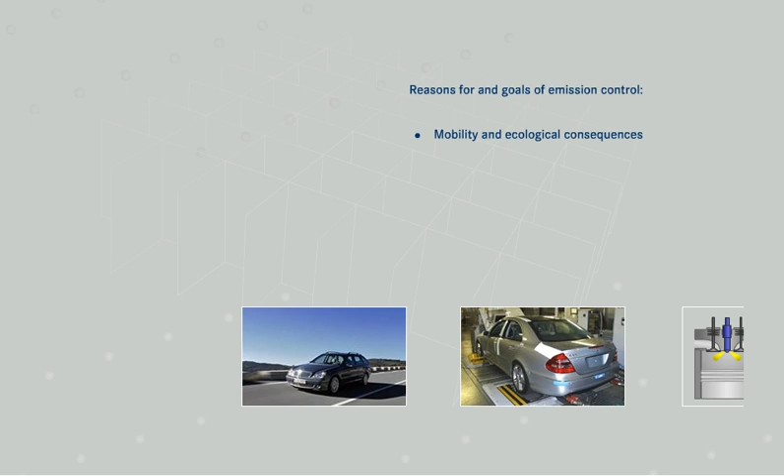Chapter 1 of this CBT program describes the reasons for and the goals of emission control. Firstly, the continued growth in individual transportation and the environmental consequences of this are dealt with. Then various national regulations and engine-related measures for limiting exhaust emissions are presented. Finally, the prerequisites for emission control are explained.

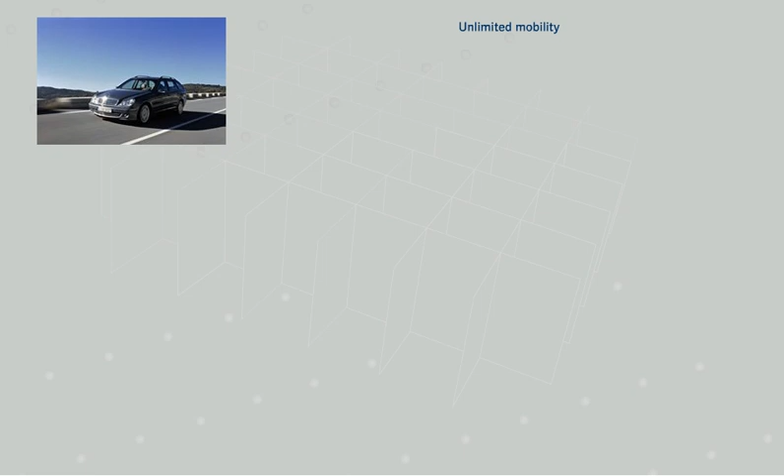The unrestricted mobility that individual transportation has given us is now part of everyday modern life. Likewise, the supply of food and consumer goods of all kinds to all areas by long-distance haulage is taken for granted. The downside to this improvement in our quality of life, however, is that the air and the environment are being increasingly polluted by harmful emissions from vehicles.

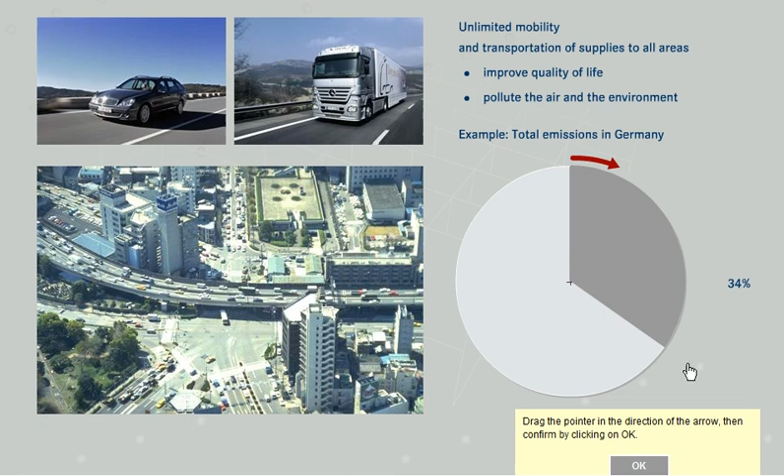Let's take Germany, for example. How much of the total volume of pollutant emissions comes from road traffic, do you think? Select a figure from the pie chart. As you can see, road traffic is responsible for around 34% of all emissions in Germany.

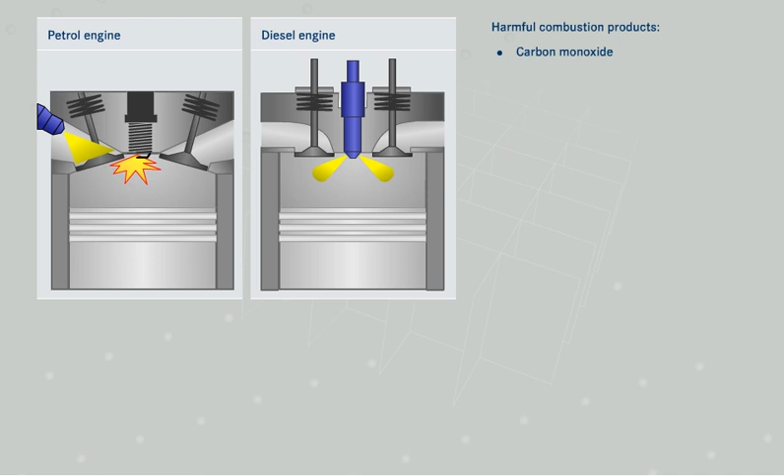The combustion of the air-fuel mixture in both petrol and diesel engines produces not just carbon dioxide and water vapour, but pollutants as well. These are carbon monoxide, nitrogen oxides, sulfur dioxide, and hydrocarbon residues. Combustion of diesel fuel also produces soot particulates.

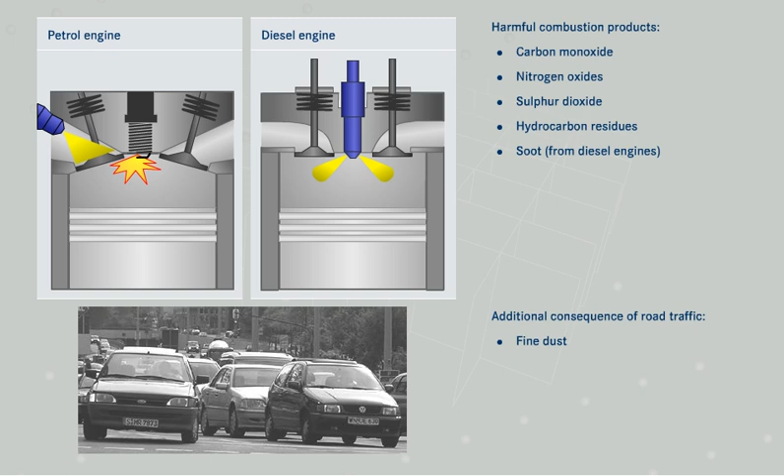An additional consequence of road traffic is the formation of fine dust. Fine dust is created not just from diesel soot particulates, but also from the abrasion of tyres, brake linings and pads, clutch linings, and road surfaces.

Click on the names of the pollutants to learn more about the effects they have.

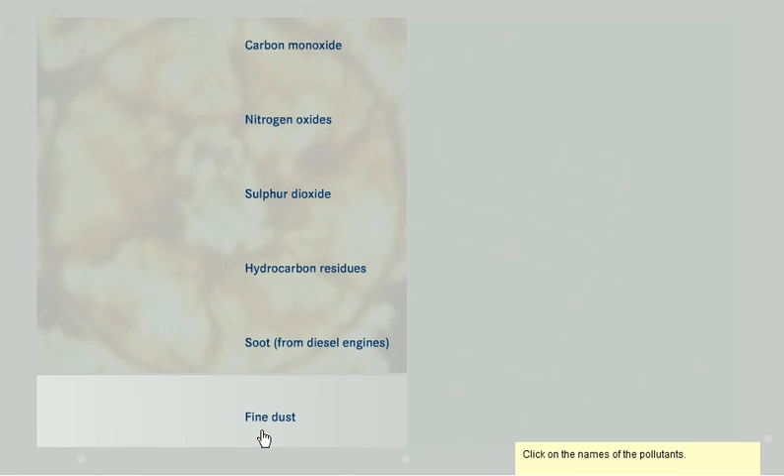The chemical symbol for carbon monoxide is CO. Carbon monoxide is poisonous because it reduces the ability of the blood to absorb oxygen.

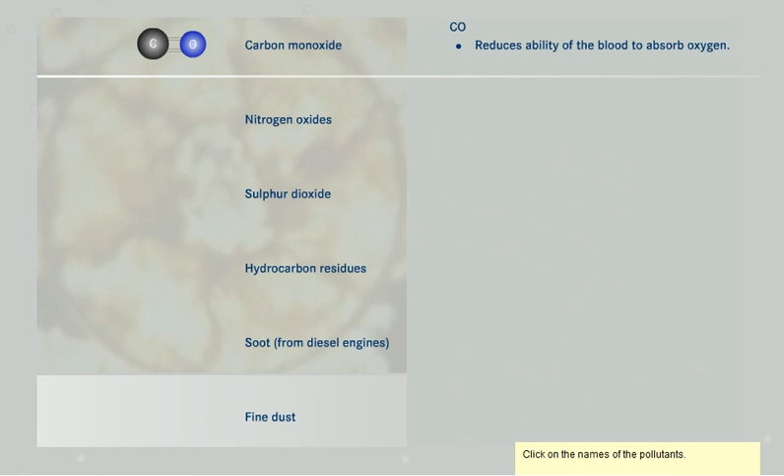Nitrogen oxides, NO and NO2, are usually referred to as NOx. They irritate the mucous membranes, affecting breathing in particular.

Sulfur dioxide has the chemical symbol SO2 and is a colourless, poisonous, pungent-smelling gas. In high concentrations, sulfur dioxide burns the mucous membranes.

Hydrocarbon residues are usually abbreviated to HC. In persistently high doses, unburned hydrocarbons are carcinogenic.

Diesel soot consists of ash and unburned hydrocarbons. Emissions of soot are measured in grams per kilometre and are referred to as the particulate mass, or PM for short. Soot particulates are thought to be carcinogenic.

Like diesel soot, fine dust is measured as a particulate mass, but in smaller units of micrograms per cubic metre. Fine dust has been categorized by the WHO, the World Health Organization, as harmful to health.

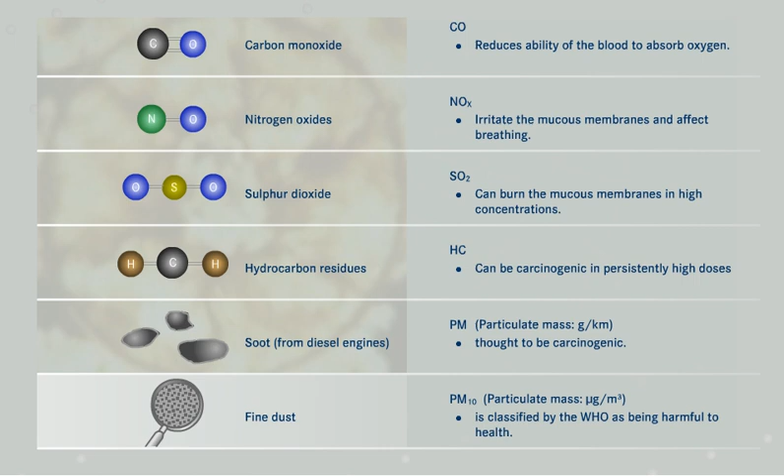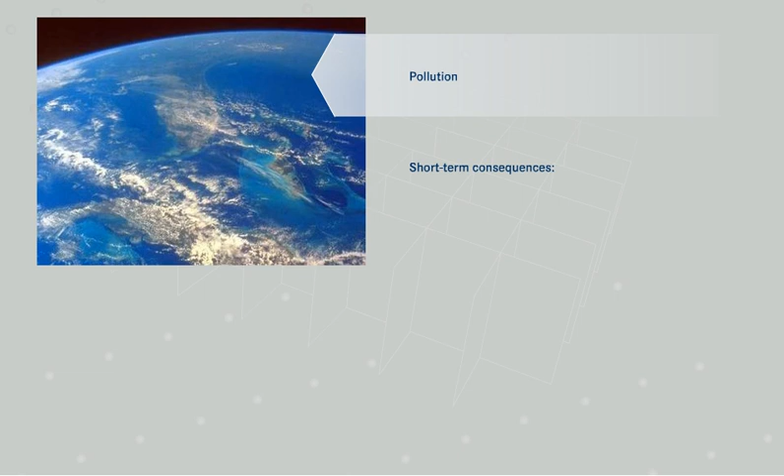All the pollutants listed here are not just harmful in the short term, they have long-term effects as well. The short-term consequences of the increased pollution of the air we breathe and the atmosphere are smog and fine dust. The long-term consequences are acid rain and the greenhouse effect.

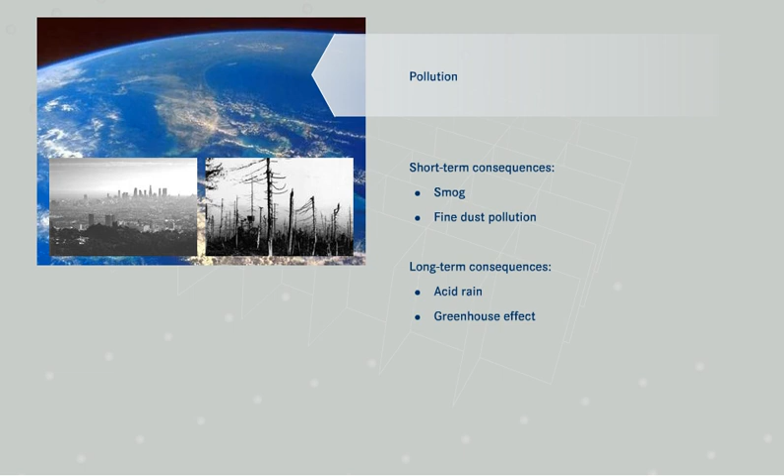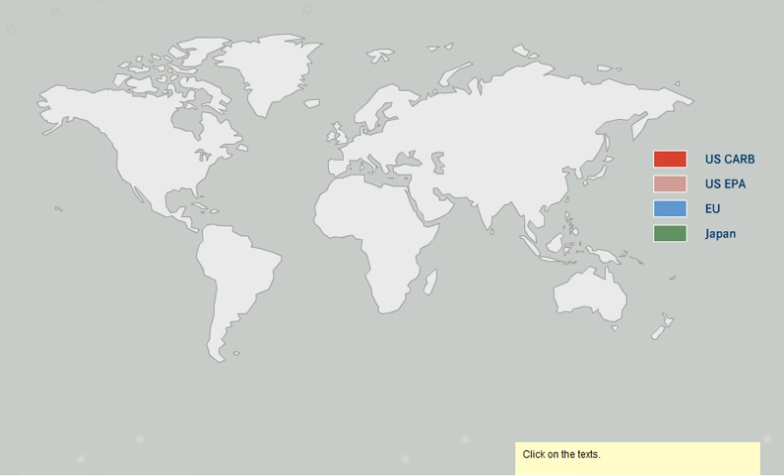Many countries in the world, for example the USA, Japan and the European Union, have set limits for the levels of pollutants in the exhaust gases of vehicles. Most of the world's emissions regulations have been drafted by the US CARB, the US EPA, the EU and Japan. You can learn more about the exhaust gas legislation drafted by these legislative bodies and the areas covered by clicking on their names.

The abbreviation CARB stands for California Air Resources Board. Though the emissions regulations for the maintenance of air quality that are produced by this authority are only applicable in California, they serve as a guideline for emissions legislation in other U.S. states.

The American Environmental Protection Agency, EPA for short, stipulates emissions standards for all U.S. states except California. Many other countries, for example Canada, Australia and Brazil, use EPA legislation as a basis for their own.

EU emissions legislation applies to the countries of the European Union. The emissions regulations of many other nations, for example India and China, are based on the European standards.

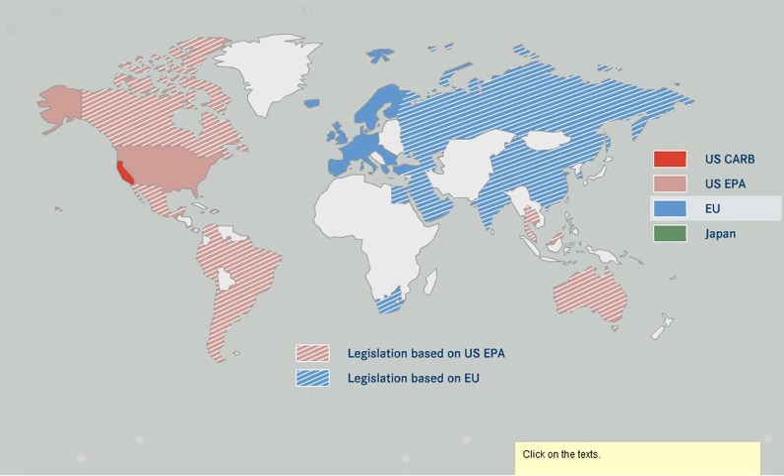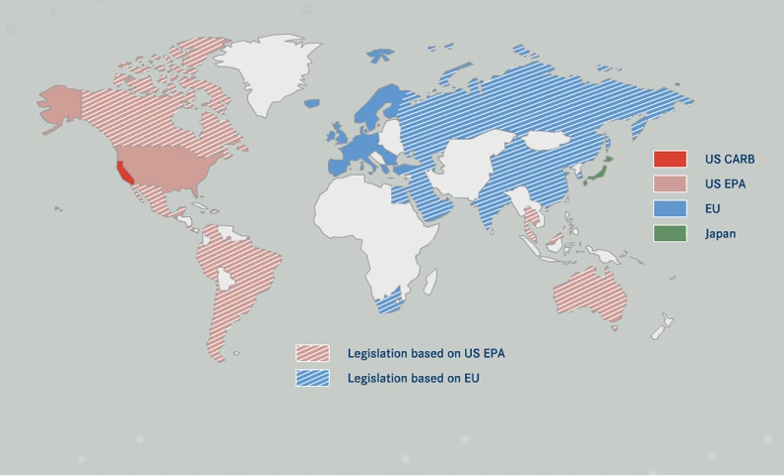Unlike other countries of the Far East and Australia, Japan has its own independent legislation. All the named legislation encompasses separate emission standards for passenger cars and trucks. Further information on this topic can be found in the glossary of technical terms.

Emissions legislation makes a distinction between vehicles with petrol engines and vehicles with diesel engines. In addition, vehicles are divided into the following classes: passenger cars, light commercial vehicles, heavy commercial vehicles, and heavy construction, forestry and agricultural vehicles. Vehicles are classified by a reference mass, that is, by vehicle weight.

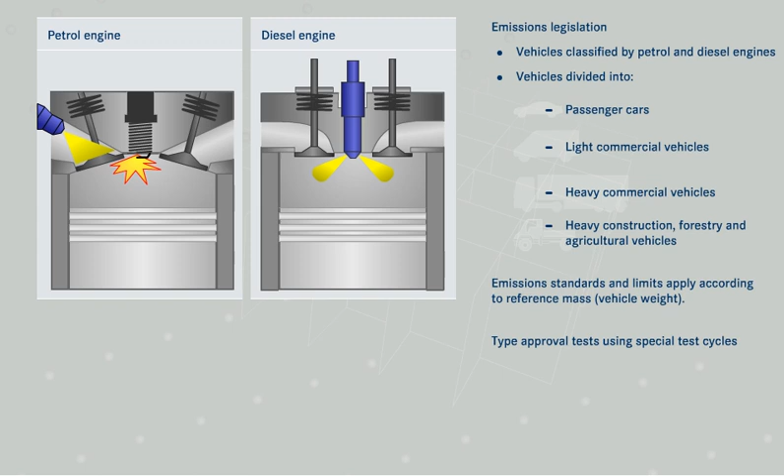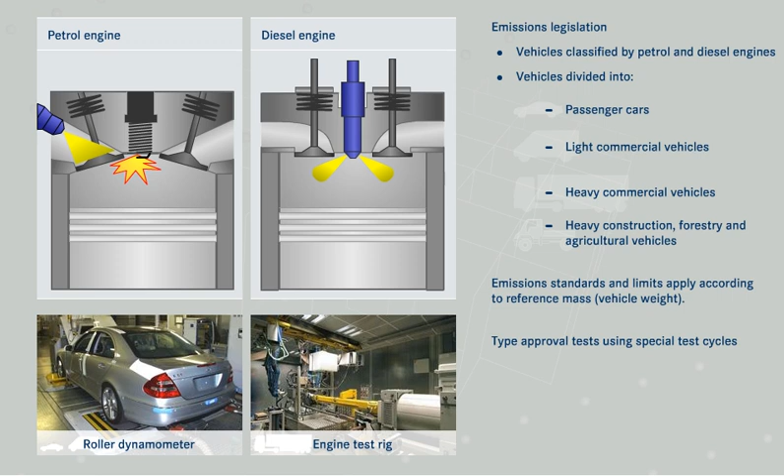The emissions standards and limits applying to passenger cars and light commercial vehicles are different from those for heavy commercial vehicles. Type approval tests check that the emissions standards are being adhered to. Here, new vehicle models have to complete special test cycles under very specific load conditions. Where passenger cars and light commercial vehicles are concerned, the complete vehicle is tested on a roller dynamometer. In the case of heavy commercial vehicles, only the engine undergoes the test cycle on an engine test rig.

Click on the diagrams to learn more about the corresponding emissions tests.

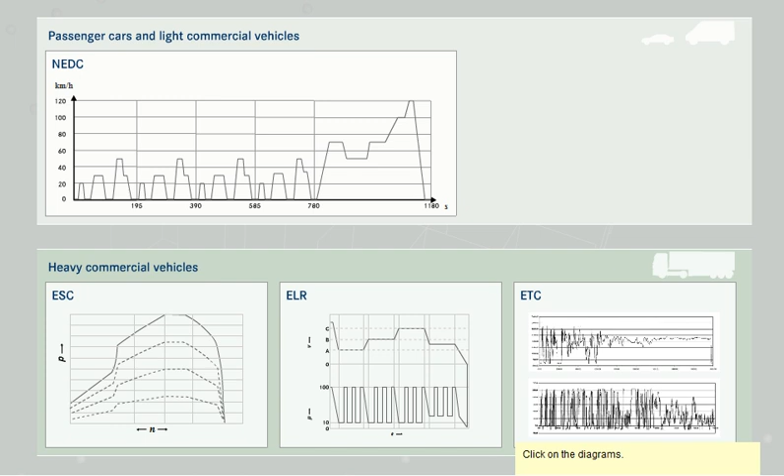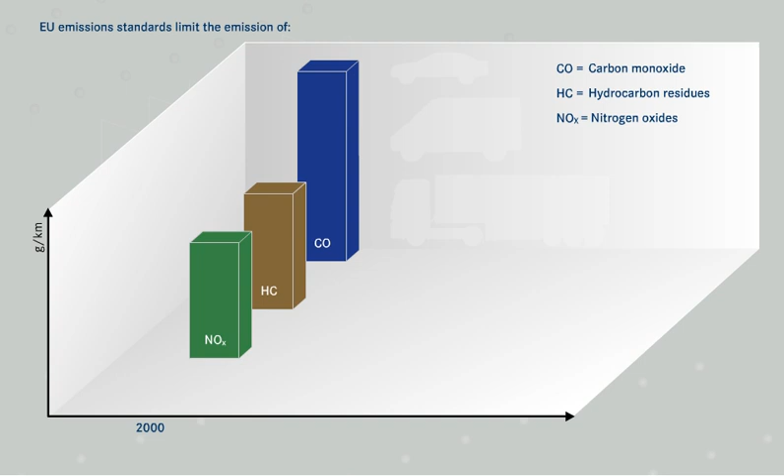Depending on vehicle class and whether the vehicle has a diesel or petrol engine, the European emissions standards impose limits on the emission of the following pollutants: carbon monoxide, hydrocarbon residues, nitrogen oxides and, in the case of vehicles with diesel engines, soot particulates. History shows that the limits for these pollutants have been lowered with each new emissions standard, and pollutant limits will continue to be cut in the future too.

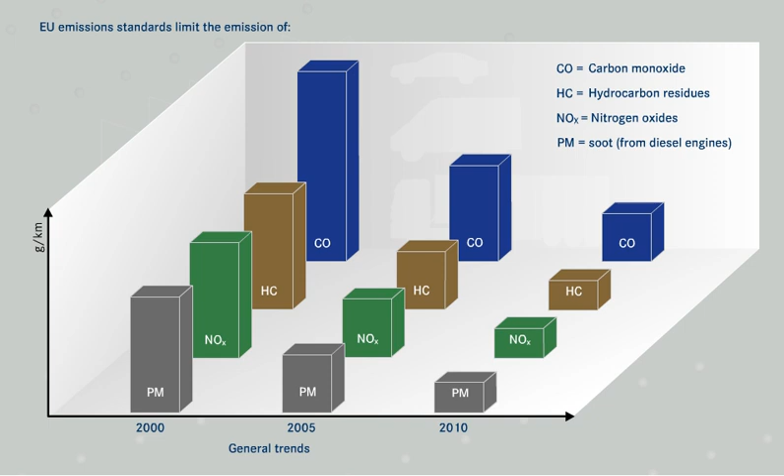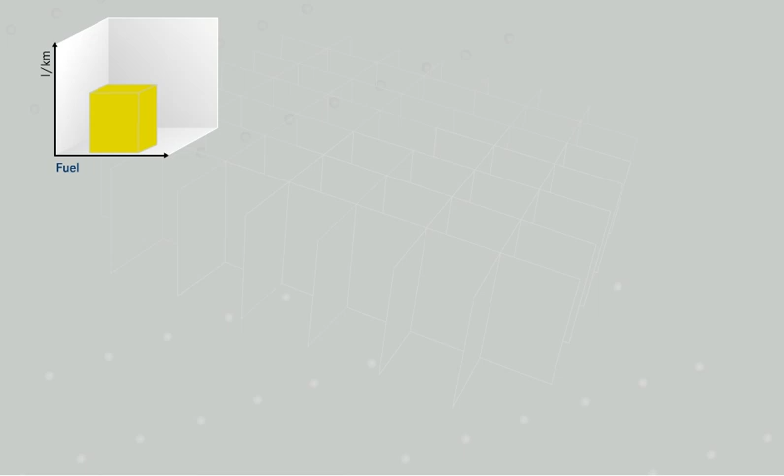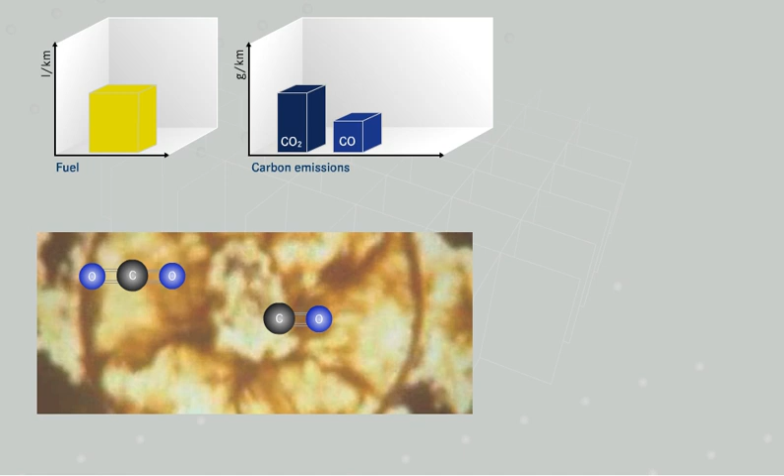Reducing the average fuel consumption is the most obvious way of reducing emissions from vehicles. Why is that so? When combustion occurs in the engine, carbon, the main component of fuel, combines with the oxygen contained in the intake air to form carbon dioxide and carbon monoxide. Partially burned fuel components produce the harmful hydrocarbon residues. The more fuel is used, the more carbon monoxide, carbon dioxide, and hydrocarbon residues are released as a result.

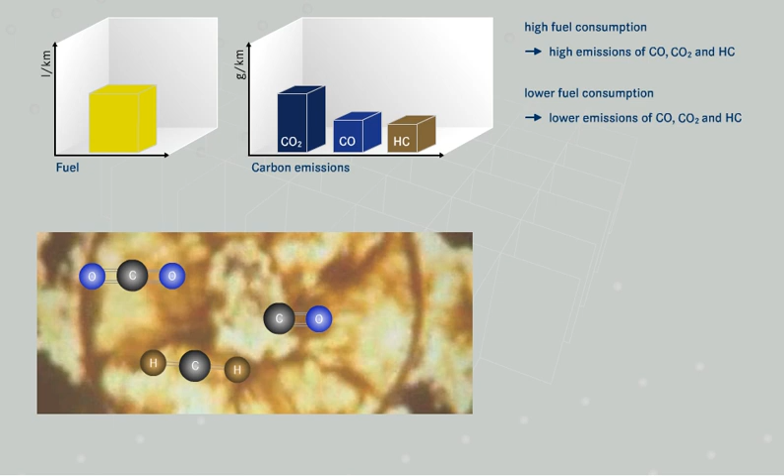It can be said, therefore, that if fuel consumption is reduced, carbon emissions will be reduced in the same proportions. This applies to both petrol and diesel fuels.

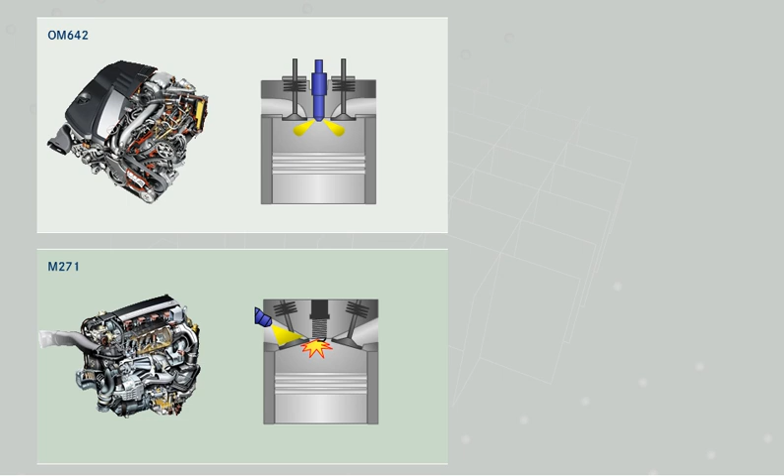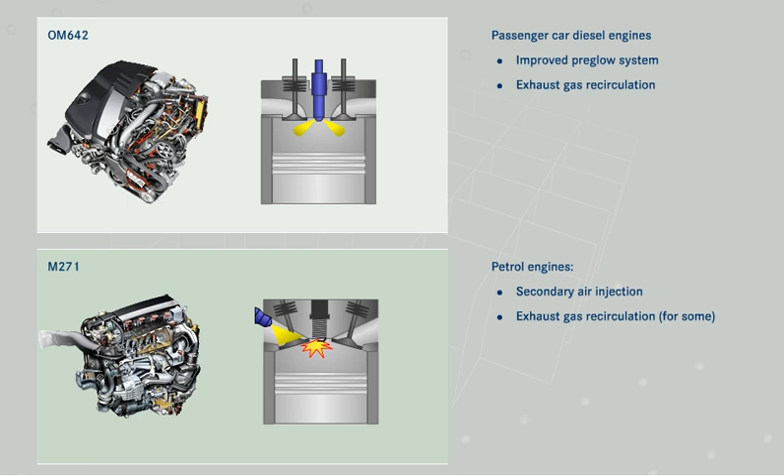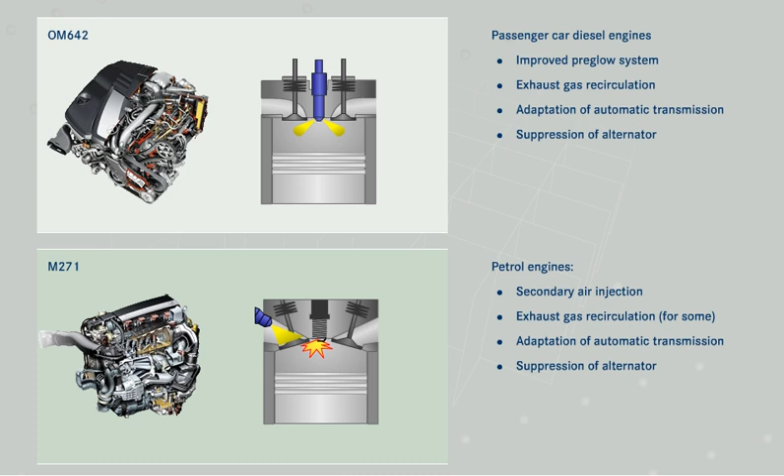Design and operation measures to minimize the formation of pollutants, particularly in the engine warm-up phase, include an improved pre-glow system for passenger car diesel engines, secondary air injection for petrol engines, exhaust gas recirculation for passenger car diesel engines and some petrol engines, and for both engine types, adaptation of the shift behavior of the automatic transmission, and suppression of electricity generation in the alternator after a cold start.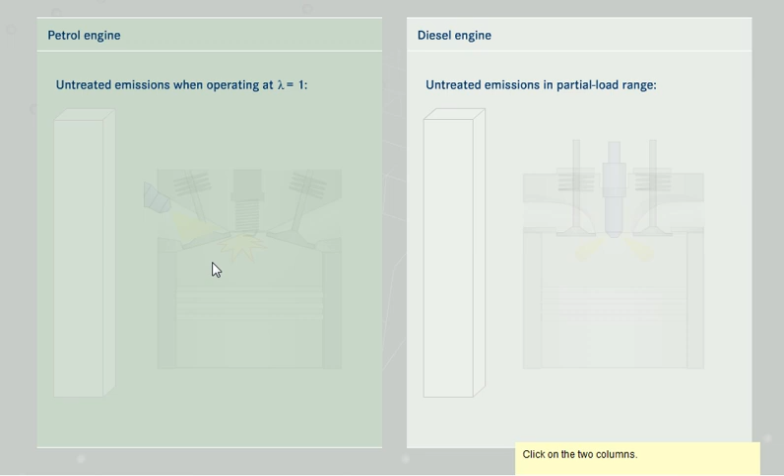Here you see in both cases that the proportion of pollutants is, on the whole, small. However, it's impossible to prevent their formation completely, even if more engine-related measures were to be introduced. Therefore, the exhaust gases must be purified. The technique chosen in each case depends on the type of engine and on the fuel used, because the latter also determines the composition of the pollutants. Click on the proportions of pollutants to learn about their composition.

Diesel engines operate with an excess of air. Therefore, they create relatively large amounts of nitrogen oxides, NOx, during combustion. As diesel fuel is in the form of a mist when burned, soot particulates also form.

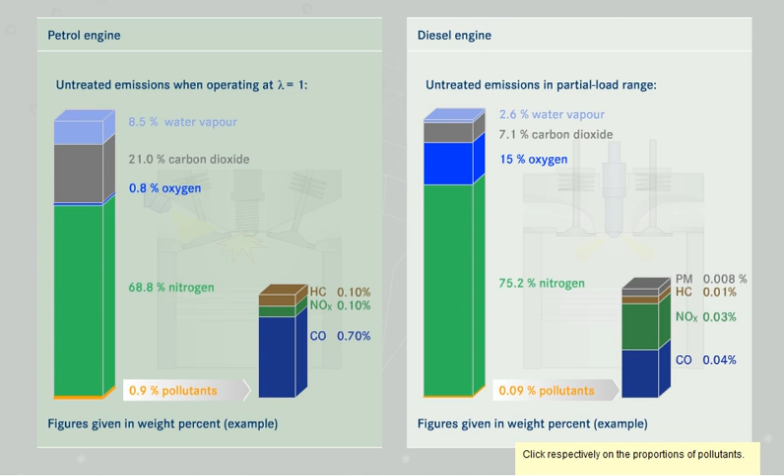The petrol engine produces fewer nitrogen oxides than the diesel engine. In the petrol engine, nitrogen oxides and residual hydrocarbons are present in a relatively equal ratio, and can therefore be neutralized more easily along with the carbon monoxide. Petrol is in a gaseous state when burned. As a result, petrol engines do not produce any measurable amounts of soot particulates.

What effect does the air-fuel mixture ratio have on combustion temperature and the formation of pollutants? As you already know, diesel engines are normally operated with an excess of air. The combustion temperature and the proportion of nitrogen oxides in the exhaust gas are therefore relatively high. The amounts of soot particulates and hydrocarbon residues produced are relatively low.

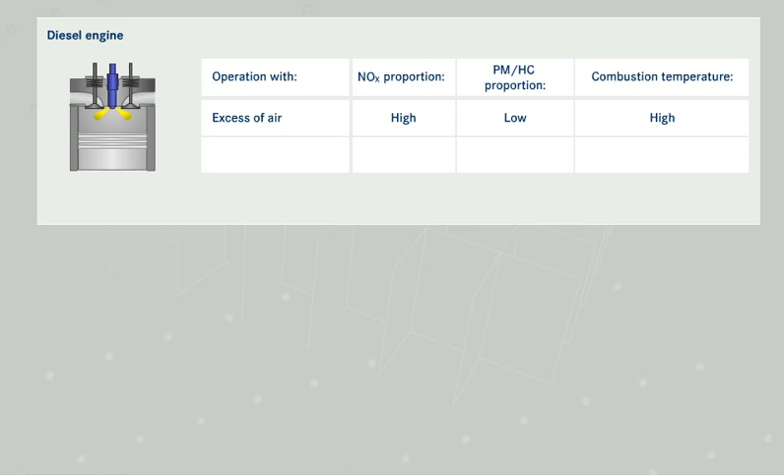Can you think what would happen if the proportion of oxygen in the air-fuel mixture is reduced by using exhaust gas recirculation? Drag the answer options into the corresponding columns in the table, then confirm by clicking on OK.

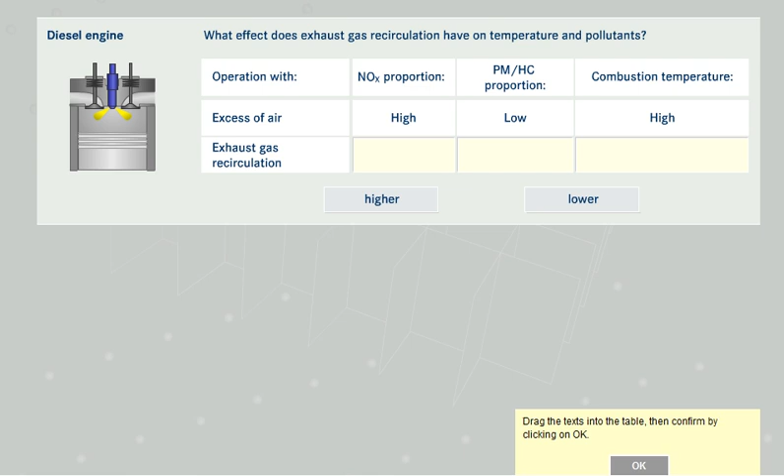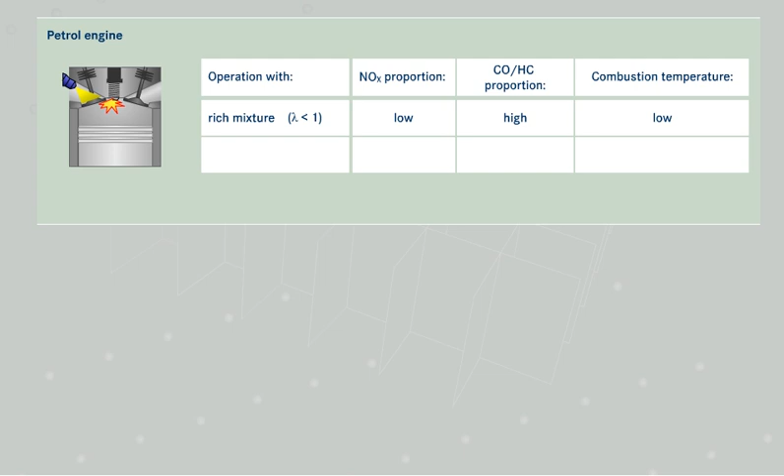What effect does mixture formation have on the combustion temperature and formation of pollutants in the petrol engine? At full load, petrol engines are operated with a rich mixture, that is, with relatively more fuel, in order to protect the engine and the exhaust system from excessively high thermal loads. Consequently, fewer nitrogen oxides, but more carbon monoxide and hydrocarbon residues are produced.

Have a think about what effects operation with a leaner mixture, that is, with a higher proportion of fresh air, would have in comparison to this. Drag the answer options to the corresponding columns in the table and confirm by clicking on OK.

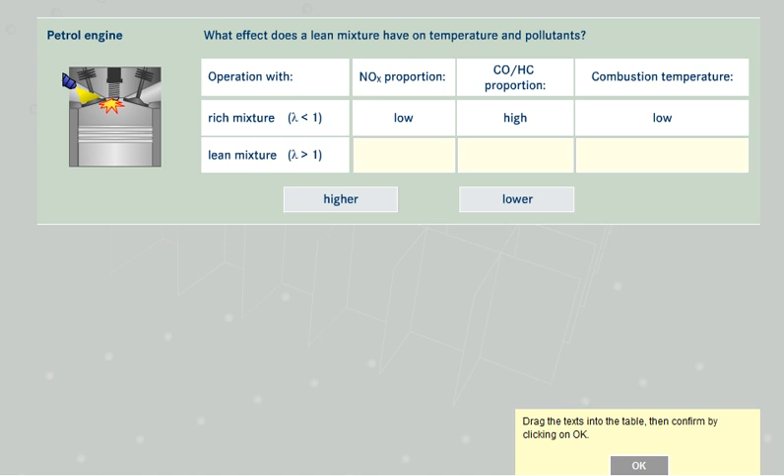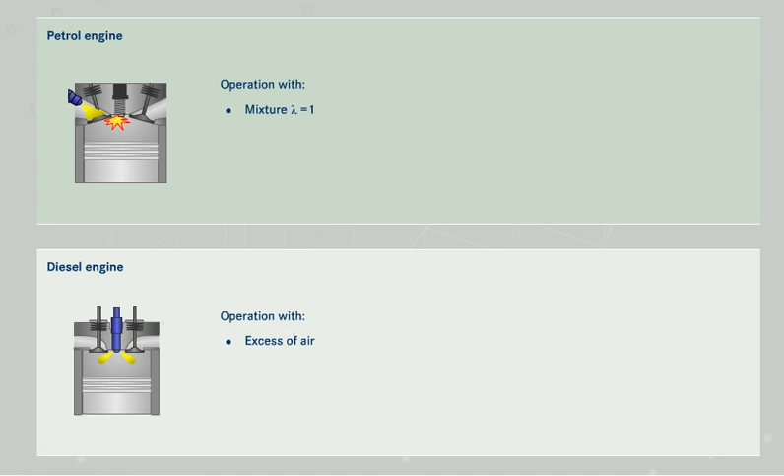You have learned that different concentrations of pollutants can arise in the exhaust gas depending on the type of engine and how it is operated. The three-way catalytic converter has become the tried and tested method of exhaust gas after treatment in the petrol engine, because in it, nitrogen oxides, carbon monoxide, and hydrocarbon residues all neutralize each other.

Petrol engines with direct injection, which can also be operated with a lean mixture, require an additional NOx storage catalytic converter. Vehicles with diesel engines are fitted with an oxidation catalytic converter to reduce the amount of carbon monoxide and hydrocarbons in the exhaust gas.

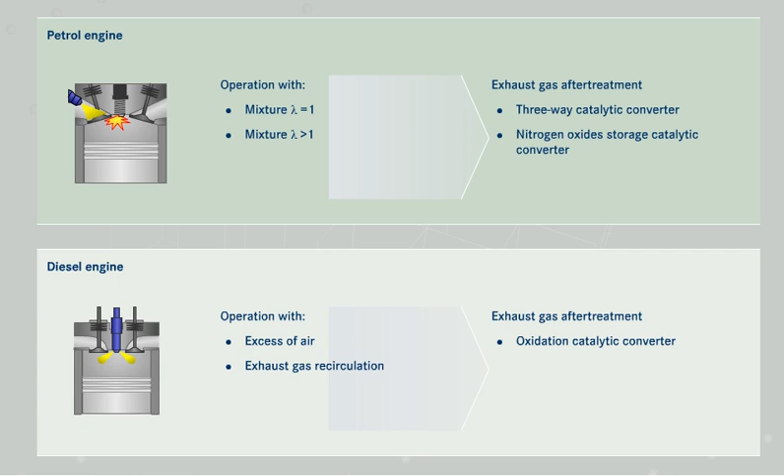The formation of nitrogen oxides is already reduced by the use of exhaust gas recirculation. Soot particulates, which are present in greater amounts as a result, must be after-treated by means of a diesel particulate filter. Heavy commercial vehicles without exhaust gas recirculation can be fitted with a selective catalytic reduction system, SCR, for the after-treatment of nitrogen oxides.

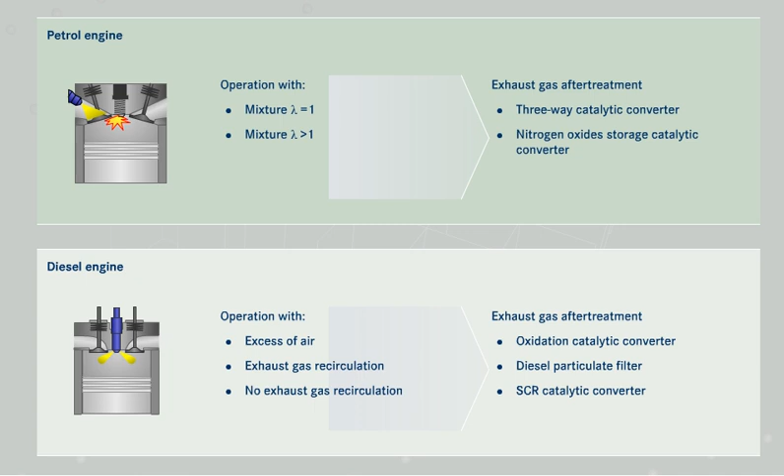In the European Community, which exhaust gas components are limited by emissions regulations? Select these components, then confirm by clicking on OK.

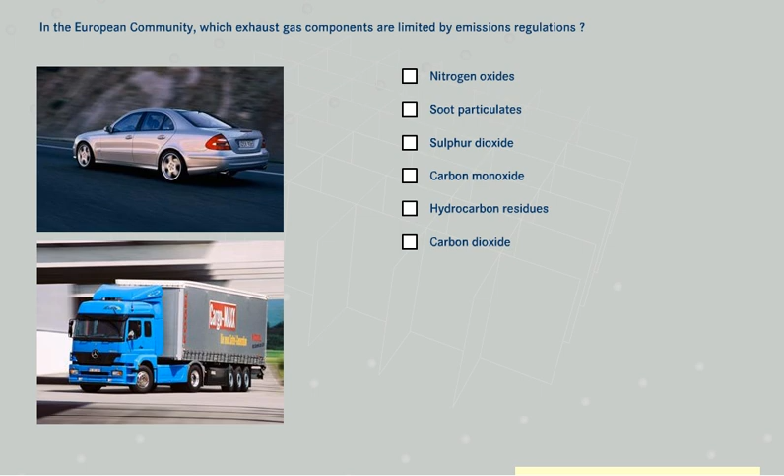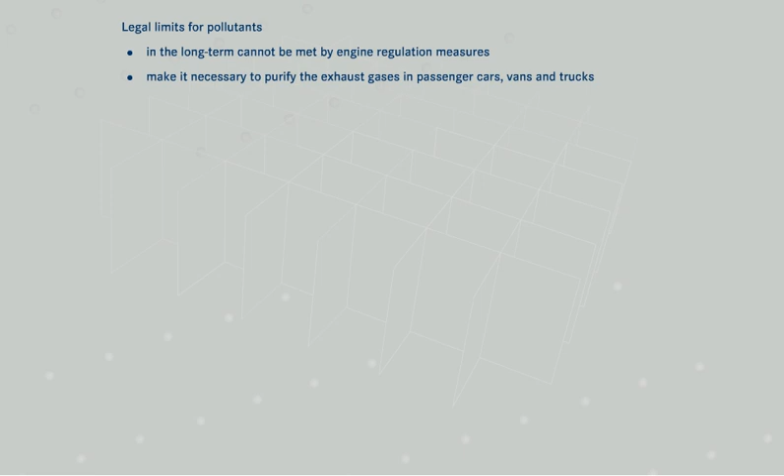Exhaust gas purification is required if the legal limits for pollutants cannot be met through engine regulation alone. This applies equally to passenger cars, vans and trucks. The exhaust gas composition of vehicles with petrol engines is different from that of vehicles with diesel engines. In each case, the exhaust gas composition can be varied to a certain extent by engine regulation.

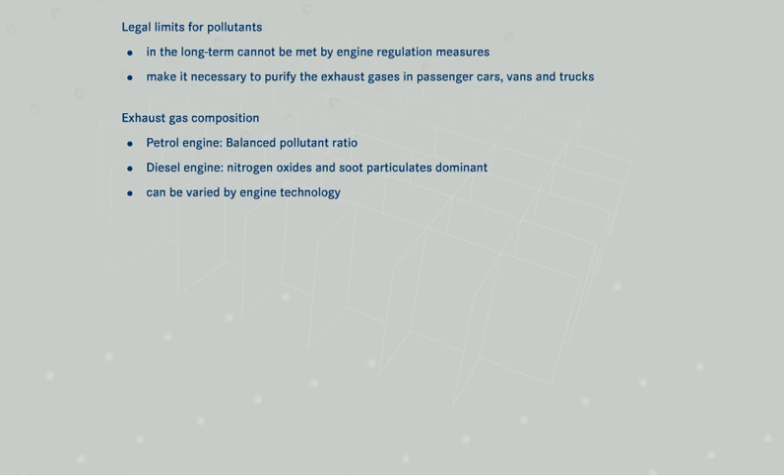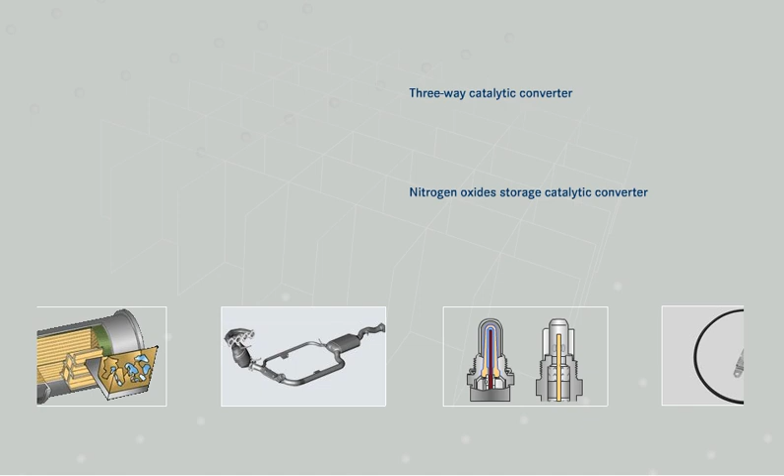Exhaust gas after treatment in petrol engines is achieved by means of a three-way catalytic converter, and in the case of petrol direct injection engines, with an additional NOx storage catalytic converter as well. The three-way catalytic converter is monitored by the oxygen sensors, the NOx storage catalytic converter by corresponding additional sensors.

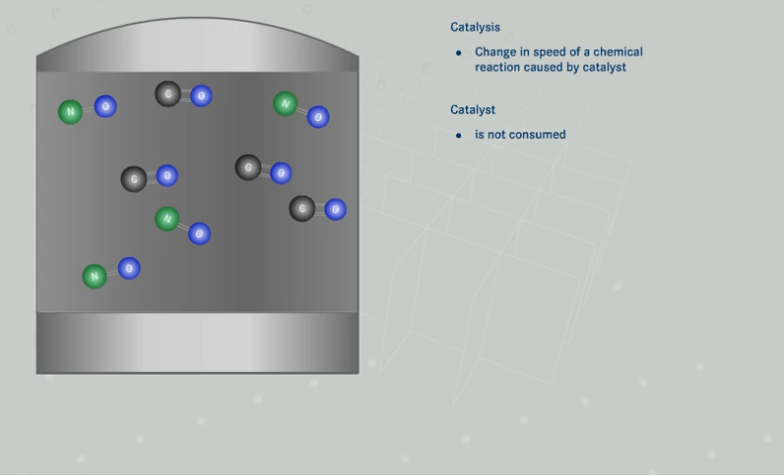The term catalysis refers to the change in speed of a chemical reaction as a result of the presence of a special substance, the catalyst. The catalyst itself is not consumed in the process. Drag the catalyst to the container containing nitrogen monoxide and carbon monoxide and observe the reaction.

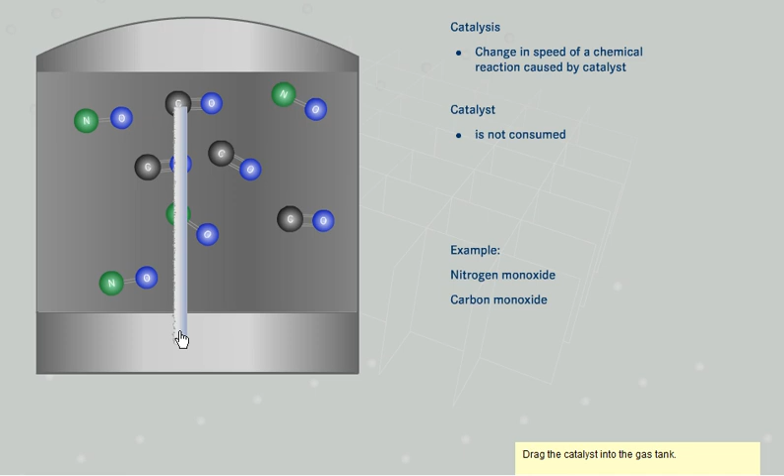You can see how the nitrogen atoms N give up their oxygen atoms O to the carbon atoms C. This reaction would also take place if a catalyst were not present, but would take much longer.

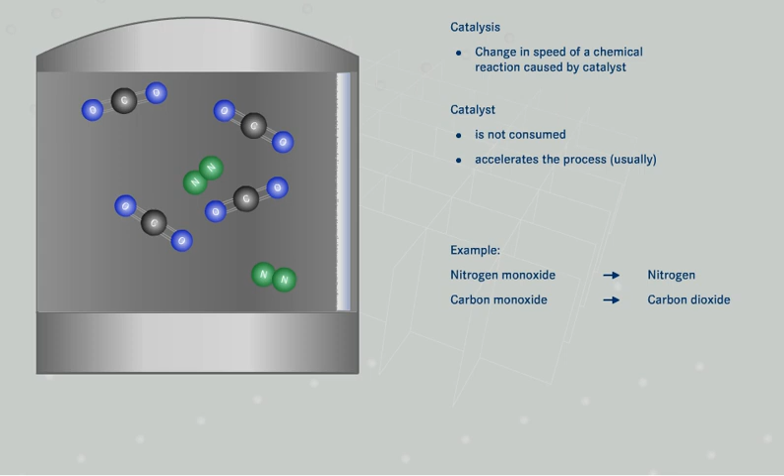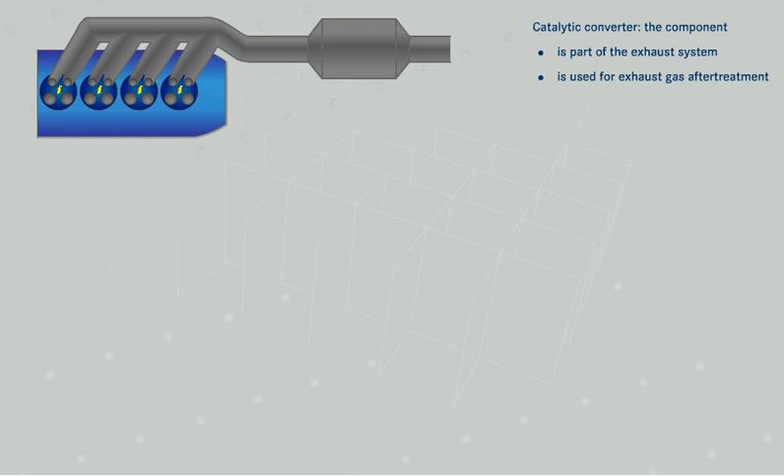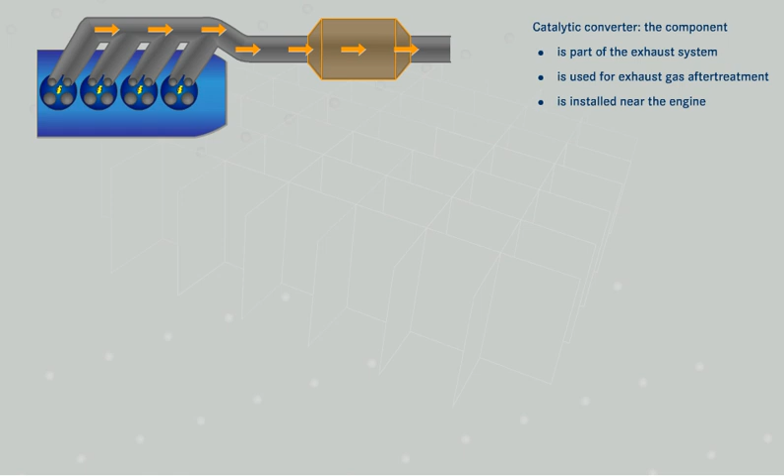In vehicles, the term catalyst is used not just for the material, but also for the entire component, the catalytic converter. It forms part of the exhaust system and is used to after-treat the pollutants in the exhaust gas. The catalytic converter is installed as close to the engine as possible, downstream of the exhaust manifold, so that the exhaust gases flowing through it can quickly bring it up to operating temperature.

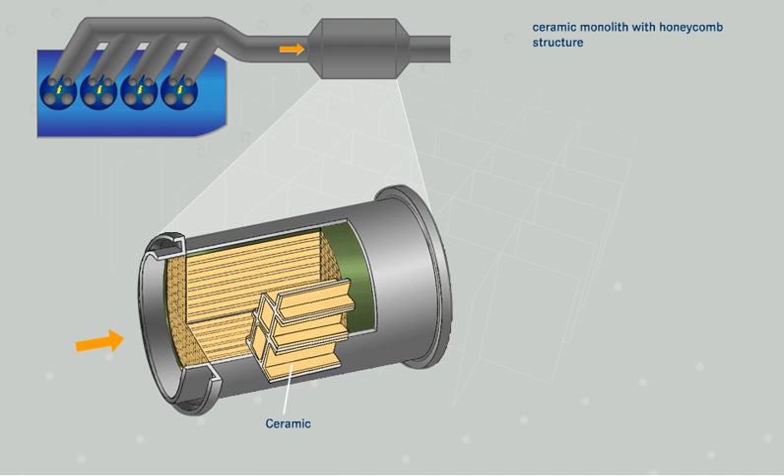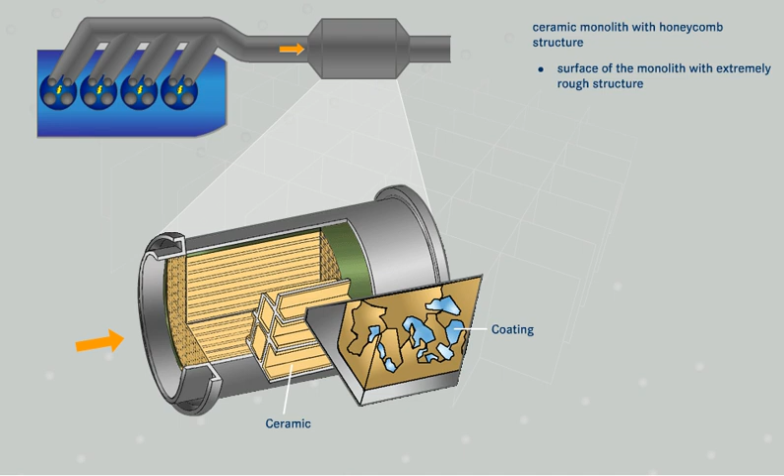The catalytic converter consists of a ceramic monolith with a honeycomb structure. The surface of the monolith has an extremely rough structure. This increases the contact area. The surface of the ceramic monolith is coated with platinum, palladium, or rhodium. These precious metals are the actual catalysts.

The housing of the catalytic converter is made from heat-resistant, high-grade steel. Between the ceramic monolith and the housing is a pliable mat made from a mineral material. This protects the ceramic from impacts and vibrations.

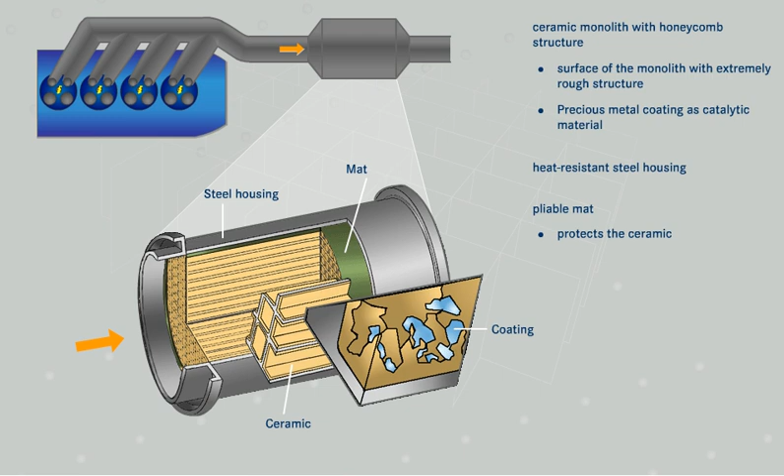The catalytic converter reduces the levels of the following pollutants in the exhaust gas: carbon monoxide, hydrocarbon residues, and nitrogen oxides. Click on a nitrogen oxide molecule and follow the reactions.

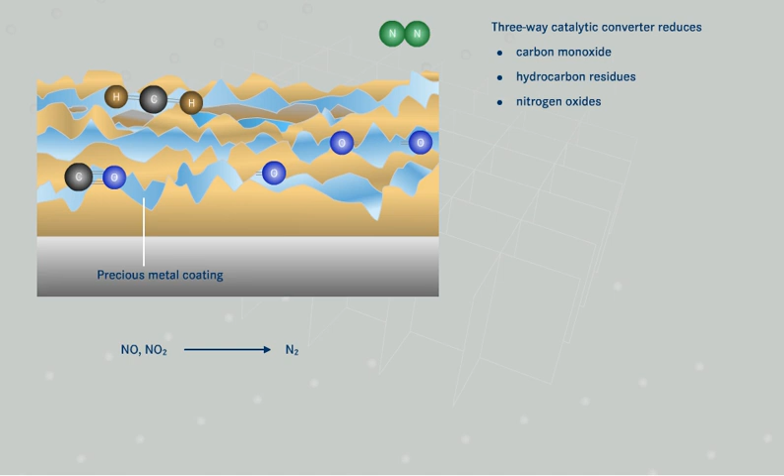At the catalytic layer on the ceramic monolith, the nitrogen oxides lose their oxygen atoms and are converted into nitrogen. As the nitrogen releases oxygen, this process is called reduction. We say, therefore, that the nitrogen oxides are reduced to nitrogen.

Now click on the carbon monoxide molecule. The carbon monoxide combines with a free oxygen atom. It oxidizes to form carbon dioxide. When a substance takes on additional oxygen atoms, this is referred to as oxidation. Have a look at oxidation and reduction again.

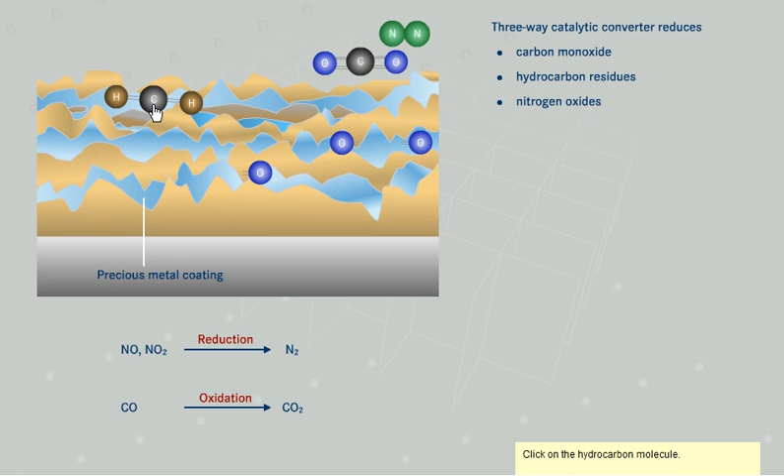So what happens to the hydrocarbon residues? Click on the hydrocarbon molecule. The hydrocarbons are oxidized to form carbon dioxide and water vapor.

Because of these three simultaneous chemical processes, the catalytic converter is also known as the three-way catalytic converter.

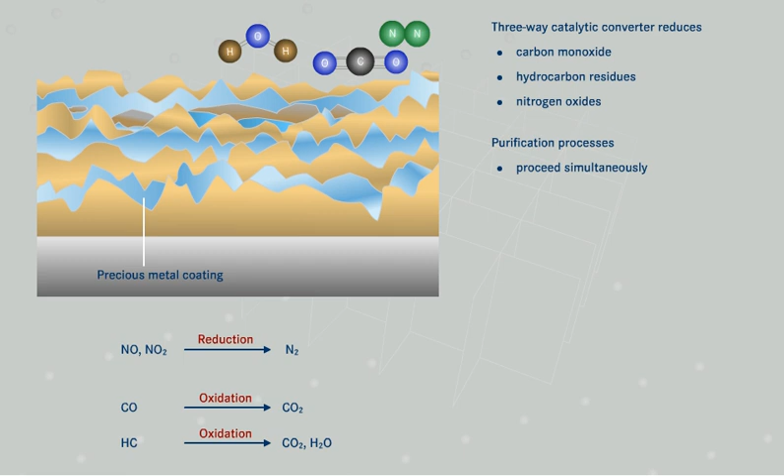For all three of these processes to proceed correctly in the catalytic converter, the exhaust gas composition needs to be as uniform as possible. Therefore, the engine control unit monitors the exhaust gas composition by means of oxygen sensors and controls the mixture formation accordingly to ensure lambda equals 1.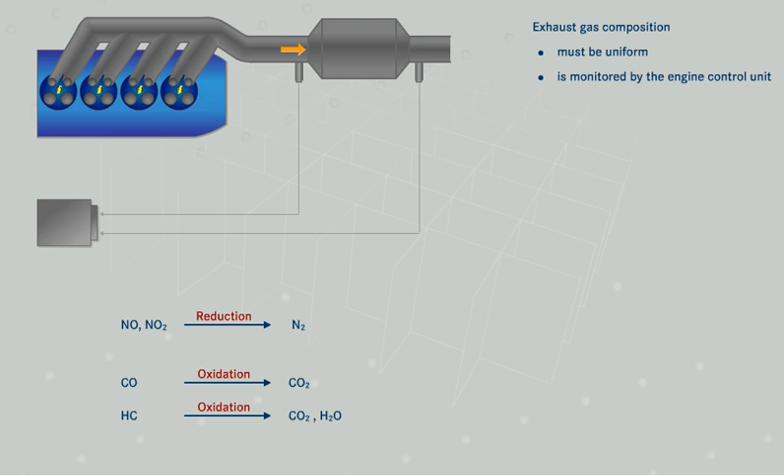If this weren't to happen, one pollutant group or other would be left over, depending on the mixture. If the mixture were lean, nitrogen oxides would remain, and if the mixture were rich, carbon monoxide and hydrocarbon residues would be left over.

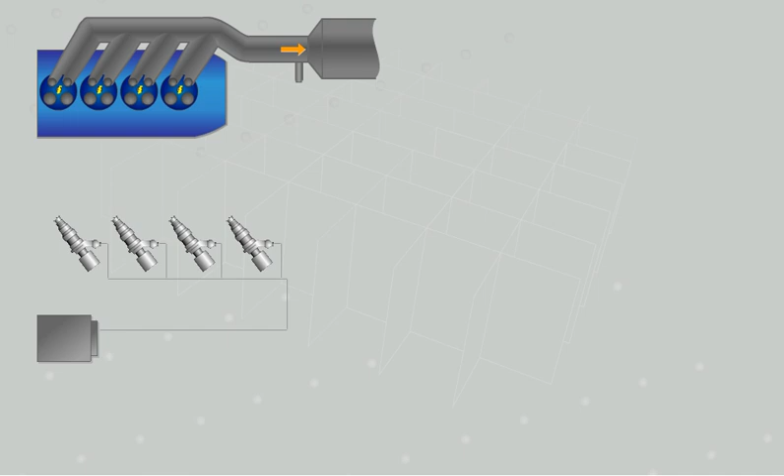The air-fuel mixture delivered to the engine doesn't always correspond 100% to the stoichiometric ratio of lambda equals 1. Therefore, the engine control unit measures the residual oxygen content in the exhaust gas using an oxygen sensor and regulates the mixture accordingly. If the residual oxygen content is too high, the mixture is made richer. If the residual oxygen content is too low, the mixture is made leaner.

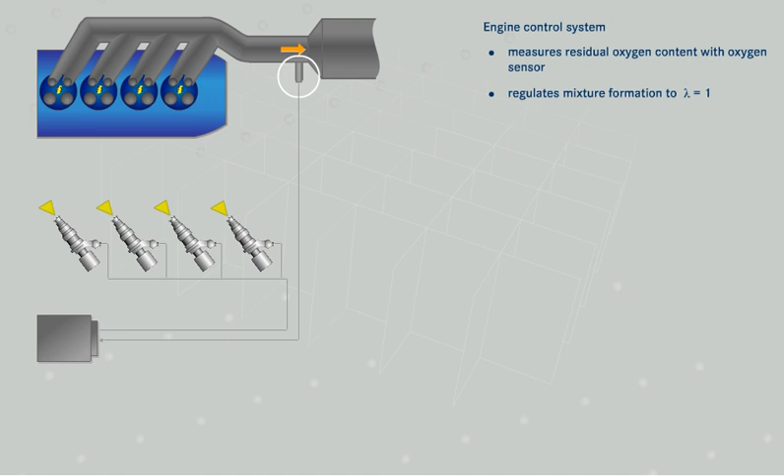As the mixture is being corrected all the time, the oxygen sensor signal, which responds to the residual oxygen content in the exhaust gas, is continually oscillating between rich and lean within the so-called lambda window.

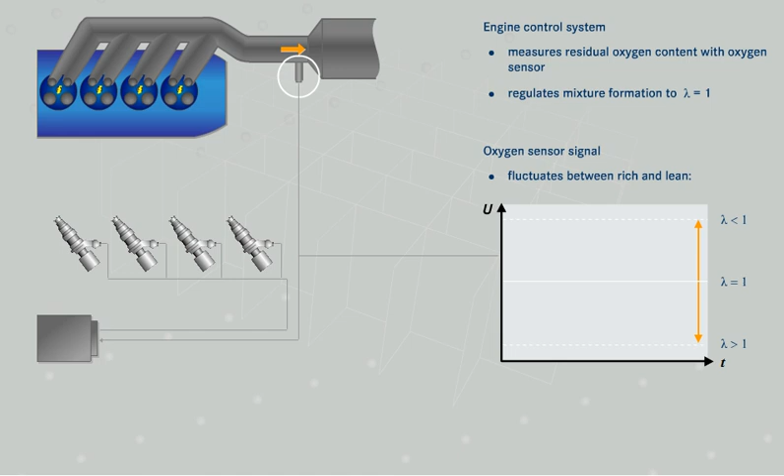Now draw the curve of the oxygen sensor signal into the diagram by alternately making the mixture lean and rich. Use the buttons to do this.

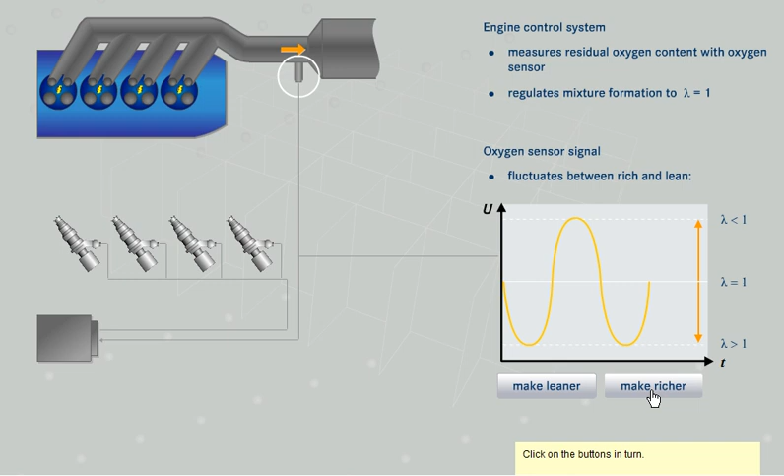The two-step oxygen sensor, known also as the voltage jump sensor, is used on petrol engines utilizing lambda equals 1 closed-loop mixture control. It extends partly into the exhaust pipe and registers the residual oxygen content in the exhaust gas.

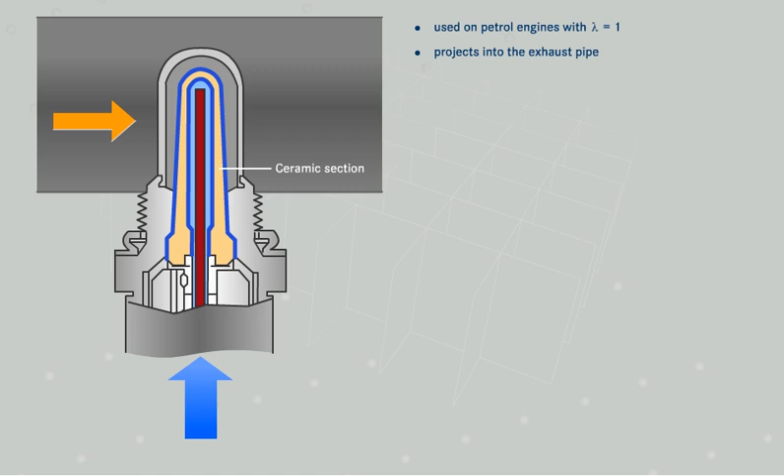The sensor consists of a ceramic body impermeable to gas and open to the fresh air side, as well as an inside and outer electrode. These electrodes enable the sensor to respond to the different oxygen concentrations in the exhaust gas and the outside air.

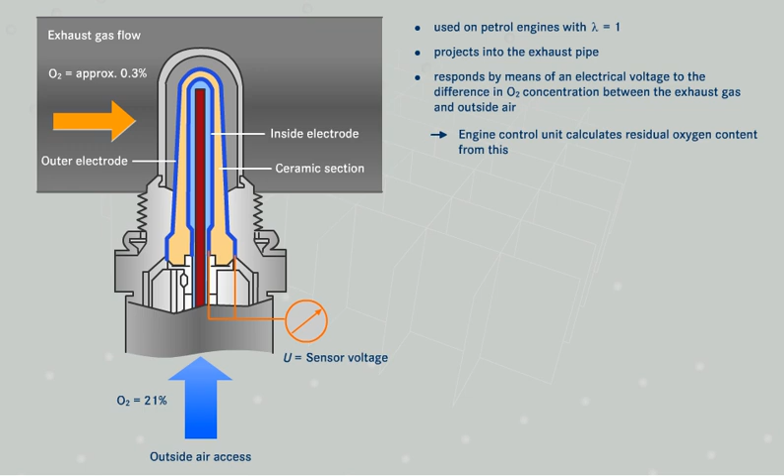Since the oxygen concentration in the outside air is considerably higher than that in the exhaust gas when the engine is running, an electrical voltage is generated between the two electrodes. From this voltage value, the engine control unit is able, in turn, to calculate the residual oxygen content in the exhaust gas. The integrated sensor heater quickly brings the sensor to the required operating temperature after the engine has been started.

In addition, the heater enables the oxygen sensor to be placed a greater distance from the engine, which improves the service life of the sensor.

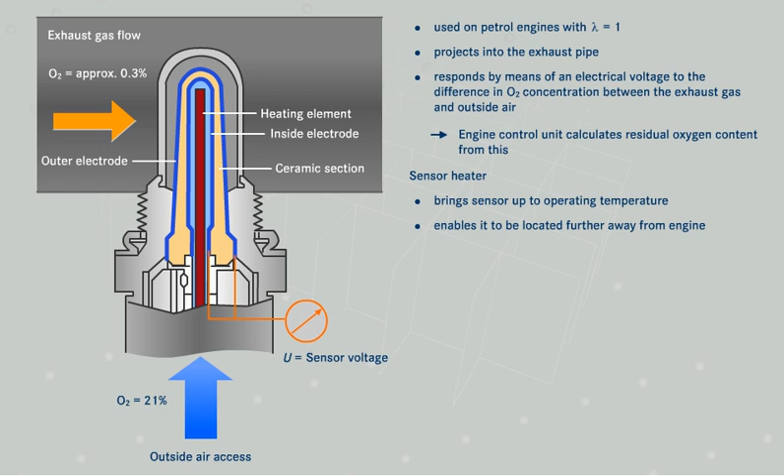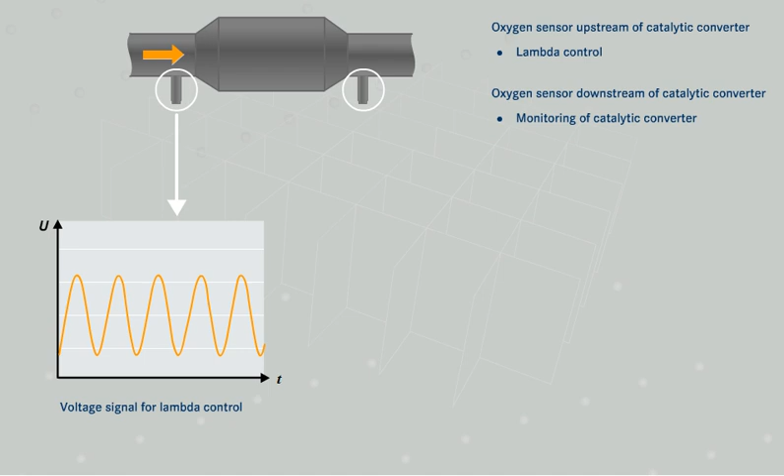The oxygen sensor upstream of the catalytic converter is used for lambda control. The signal from the oxygen sensor, located downstream of the catalytic converter, is used to check the efficiency of the catalytic converter. When the catalytic converter is operating, the voltage signal from the oxygen sensor downstream of the catalytic converter fluctuates considerably less than the signal from the sensor upstream of the catalytic converter.

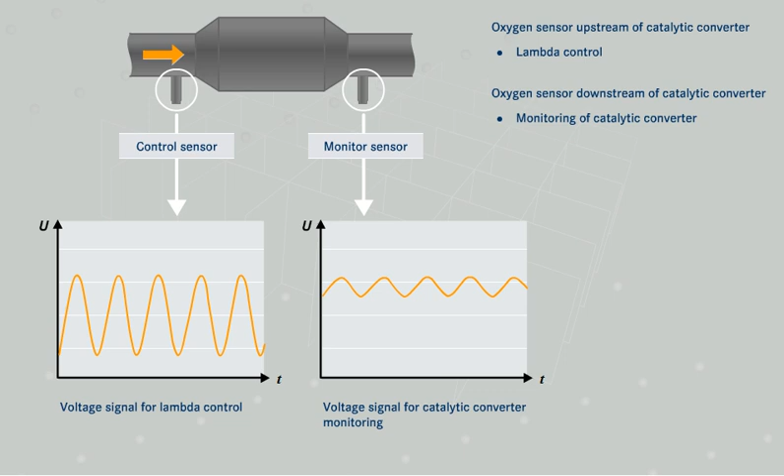Because of the different tasks that they do, the two sensors are also known as the control sensor. This is the sensor upstream of the catalytic converter, and the monitor sensor. This is the sensor downstream of the catalytic converter.

Now compare the signal of a simple voltage jump oxygen sensor with that from a broadband oxygen sensor. To do this, click on the two diagrams.

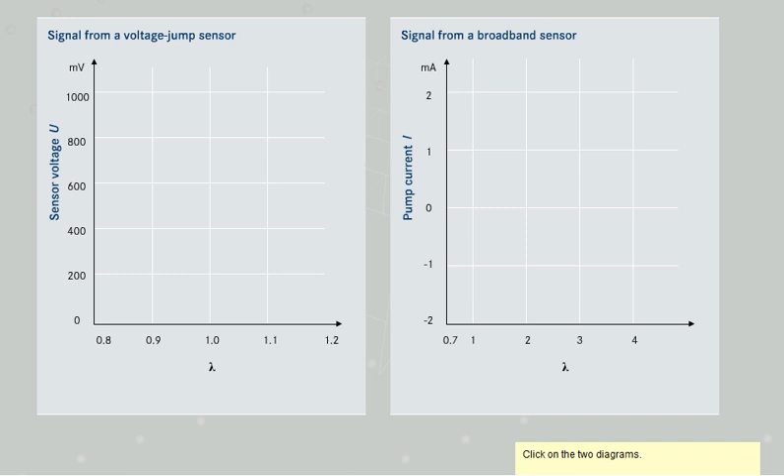The two-step lambda oxygen sensor indicates whether there is a lack of oxygen in the exhaust gas when the mixture is rich, or whether there is an excess of oxygen when the mixture is lean.

However, the engine control unit can only evaluate the sensor signal in a very narrow range around lambda equals 1. As soon as the range around lambda equals 1 is left, the signal only changes very slightly, with the result that it's no longer possible to determine lambda.

This is why the simple voltage jump sensor is only used on petrol engines with lambda equals 1 closed-loop mixture control.

The simple voltage jump sensor is not suitable for use in engines which are also operated in the lean control range. In these engines, a broadband oxygen sensor is used as the control sensor upstream of the catalytic converter. The broadband oxygen sensor sends a signal which varies continually over a very wide lambda range.